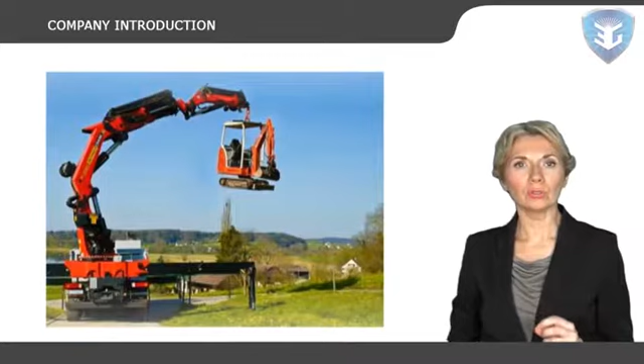Construction equipment has expanded its ability to provide custom machines for specialized applications. Today, its portfolio of authorized modification partners and accompanying support structures enables customers to meet their individual requirements throughout the Volvo global distribution network. Volvo Construction Equipment supplies complete solutions for automated materials handling and internal logistics.

The company has separated all of its material handling equipment into 4 main categories: storage and handling equipment, engineered systems, industrial trucks, and bulk material handling.

Equipment and utensils such as industrial trucks, forklifts, conveyors, etc., used for processing or otherwise handling edible product or ingredients are of such material and construction to facilitate thorough cleaning and to ensure that their use will not cause the adulteration of the product during processing, handling, or storage.

Different types of equipment are used in construction work for the handling of materials. So when a company is designing equipment for material, it is necessary to know about the purpose of that equipment. Whether it's for long distance or short distance handling, the equipment must be able to carry the material safely in the same condition to its destination.

Now in this competitive era where every day new equipment is launched in the market, a big issue in front of companies is to make such equipment which can be used for different functions. The question remains, is it easy for a company to design such equipment?

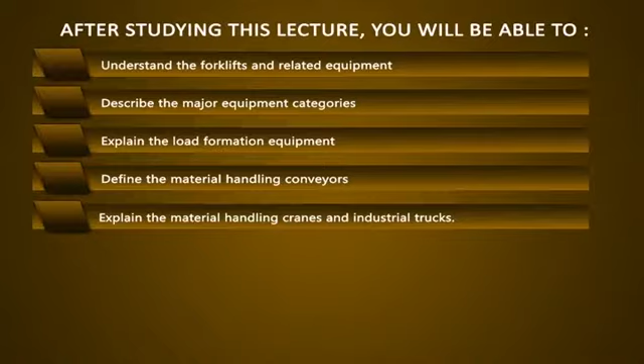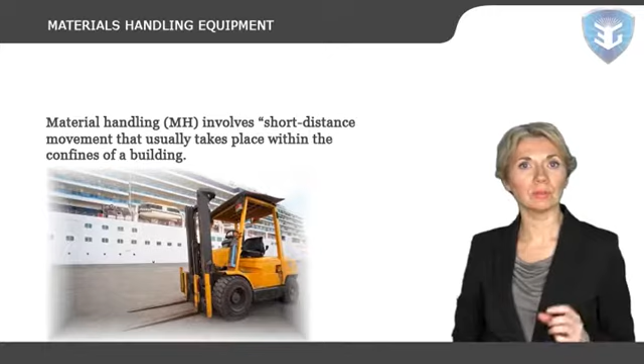Let's start with a brief introduction to materials handling equipment. Material handling, or MH, involves short distance movement that usually takes place within the confines of a building, such as a plant or a warehouse, and between a building and a transportation agency.

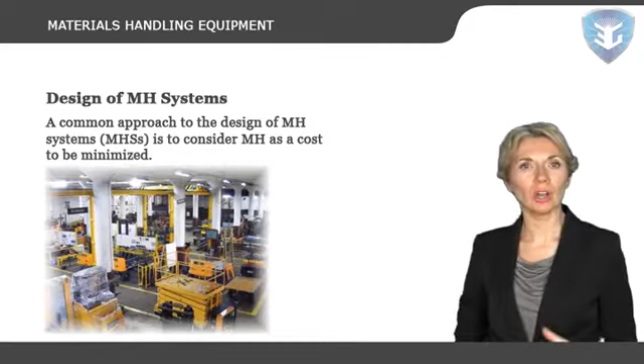Design of MH systems. A common approach to the design of MH systems is to consider MH as a cost to be minimized. This approach may be the most appropriate in many situations because while MH can add real value to a product, it is usually difficult to identify and quantify the benefits associated with MH.

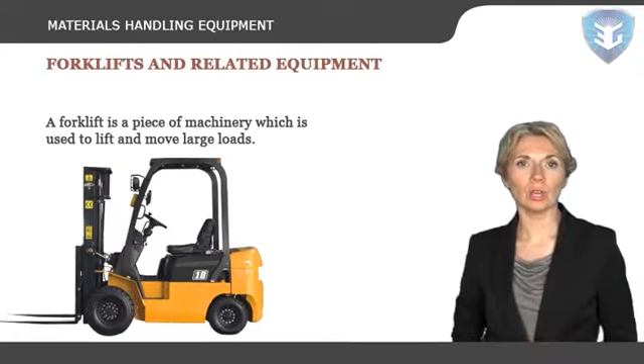Let's discuss forklifts and related equipment. A forklift is a piece of machinery which is used to lift and move large loads. There are numerous useful applications for a forklift, and many warehouses, construction sites, and manufacturing facilities have forklifts on hand.

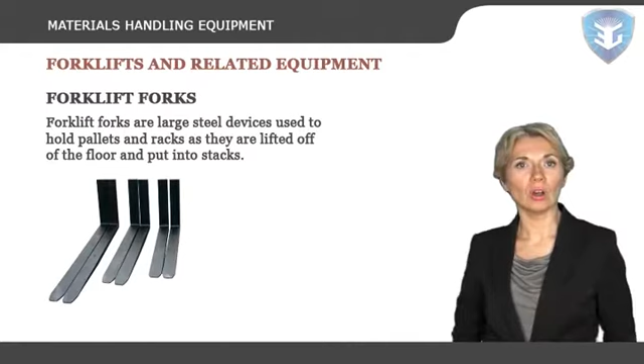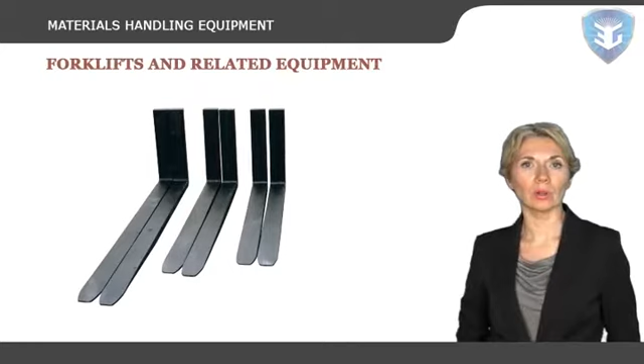Forklift forks. Forklift forks are large steel devices used to hold pallets and racks as they are lifted off of the floor and put into stacks. Made from solid steel, forklift forks are very heavy and are machined to be thick near the back of the fork and taper off to a thin front edge.

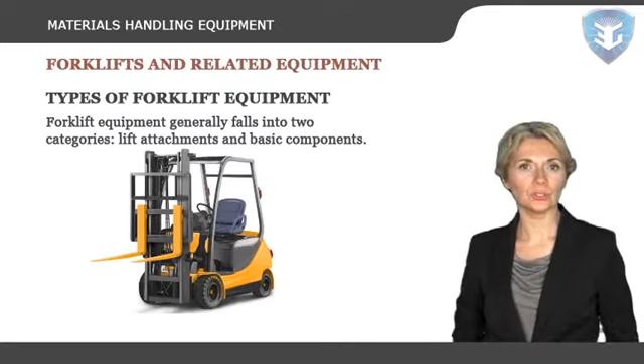Types of forklift equipment. Forklift equipment generally falls into 2 categories: lift attachments and basic components. Most basic components are included with the forklift at purchase, although they can be changed or otherwise replaced during the course of the forklift's usable life. Lift attachments are various tools that can be fitted to the lift to accommodate different applications.

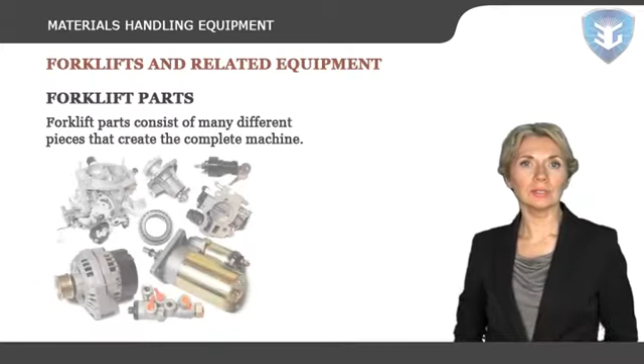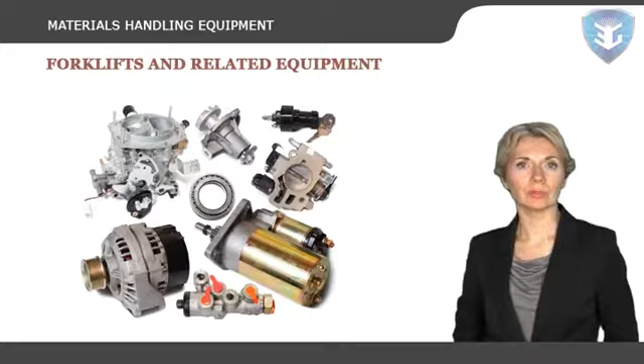Forklift parts. Forklift parts consist of many different pieces that create the complete machine. From hydraulic hoses to batteries, cables, and electric motors, forklift parts are usually very heavy and made of only the best materials.

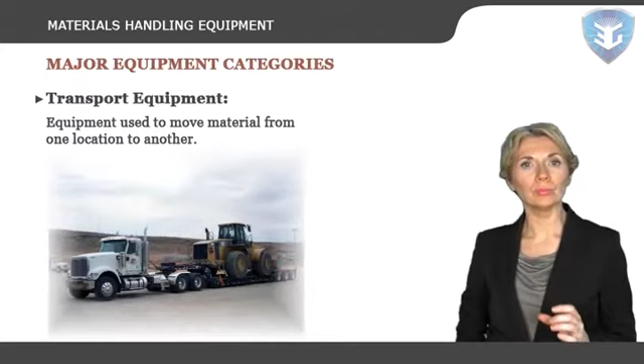Did you know the history of the forklift dates back to the 1920s, when several manufacturers began to explore new designs for lifting trucks? We shall now discuss the 5 major equipment categories. They are transport equipment, equipment used to move material from one location to another. The major subcategories of transport equipment are conveyors, cranes, and industrial trucks. Materials can also be transported manually using no equipment.

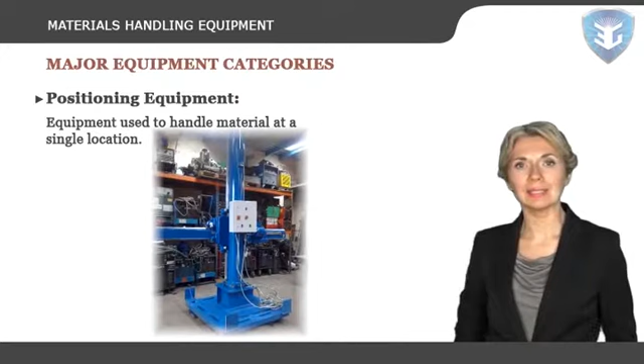Positioning equipment, equipment used to handle material at a single location. Unlike transport equipment, positioning equipment is usually used for handling at a single workplace. Materials can also be positioned manually using no equipment.

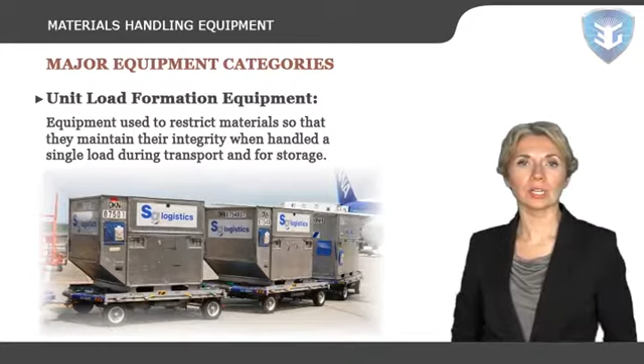Unit load formation equipment: equipment used to restrict materials so that they maintain their integrity when handling a single load during transport and for storage. If materials are self-restraining, then they can be formed into a unit load with no equipment.

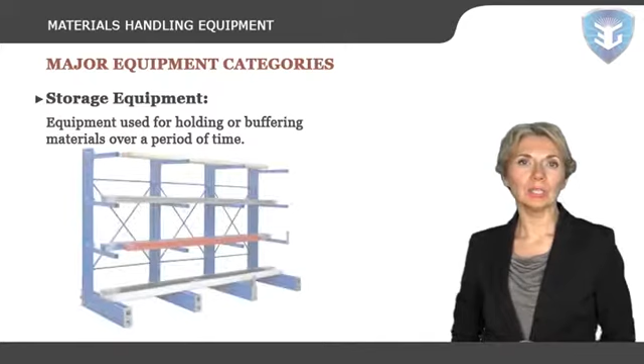Storage equipment: equipment used for holding or buffering materials over a period of time. Some storage equipment may include the transport of materials, for example, the S/R machines of an AS/RS or storage carousels. If materials are block stacked directly on the floor, then no storage equipment is required.

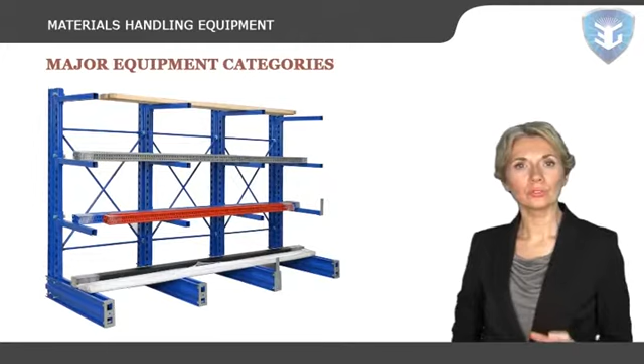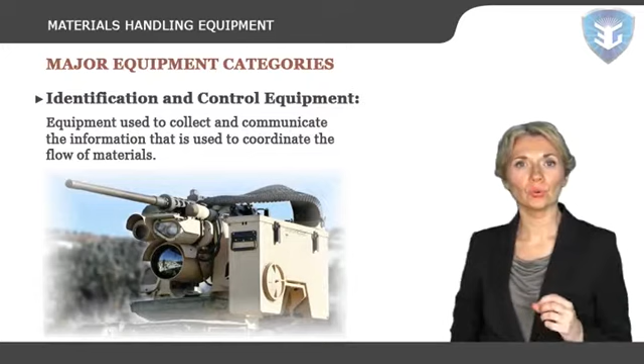Identification and control equipment: equipment used to collect and communicate the information that is used to coordinate the flow of materials within a facility and between a facility and its suppliers and customers. Let's now talk about load formation equipment.

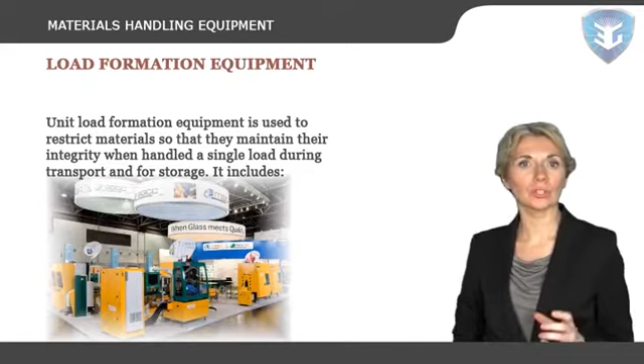Unit load formation equipment is used to restrict materials so that they maintain their integrity when handled in a single load during transport and for storage. If materials are self-restraining, then they can be formed into a unit load with no equipment. Self-restraining, no equipment: one or more items that can maintain their integrity when handled as a single item.

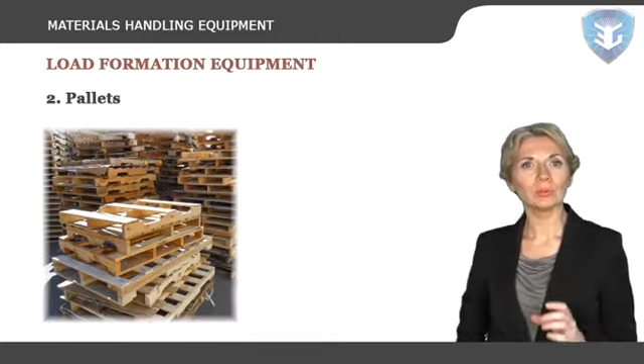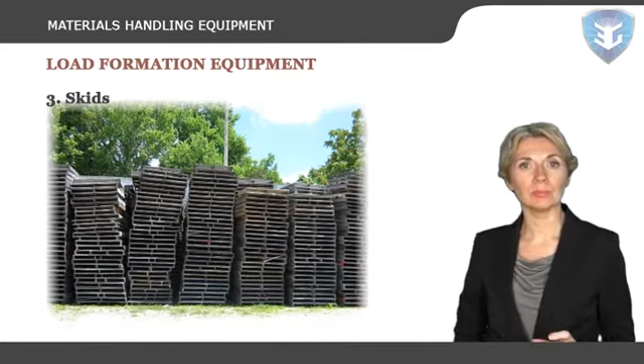Pallets: platform with enough clearance beneath its top surface or face to enable the insertion of forks for subsequent lifting purposes. Skids: platform, typically metal, with enough clearance beneath its top surface to enable a platform truck to move underneath for subsequent lifting purposes.

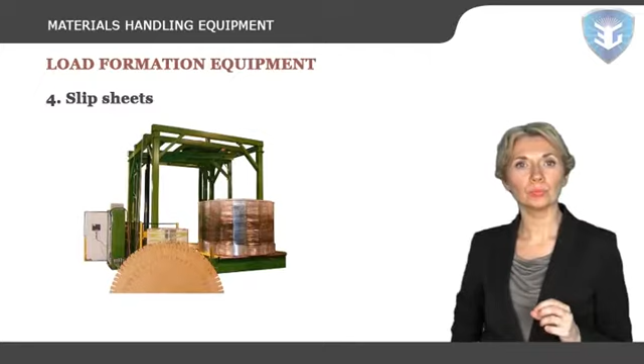Slip sheets: thick piece of paper, corrugated fiber, or plastic upon which a load is placed. Handling method: tabs on the sheet are grabbed by a special push-pull lift truck attachment. Disadvantages: slower handling as compared to pallets, greater load damage within the facility. Special lift truck attachment reduces the vehicle's load capacity.

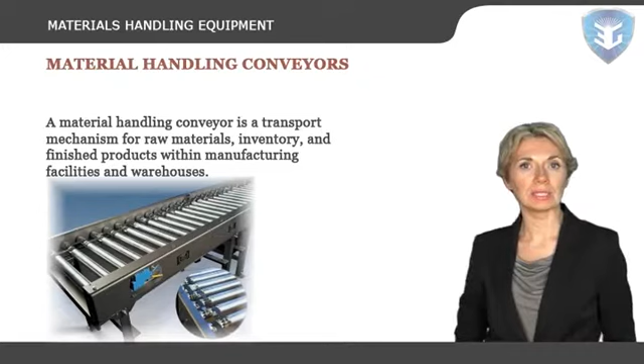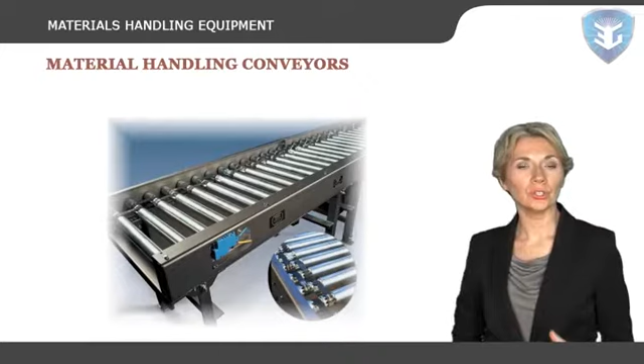A material handling conveyor is a transport mechanism for raw materials, inventory, and finished products within manufacturing facilities and warehouses. These conveyors are distinct from other conveyor systems in their construction and the fact that they are generally used for unit as opposed to bulk material transport. Conveyors are used when material is to be moved frequently between specific points, to move materials over a fixed path, when there is a sufficient flow volume to justify the fixed conveyor investment.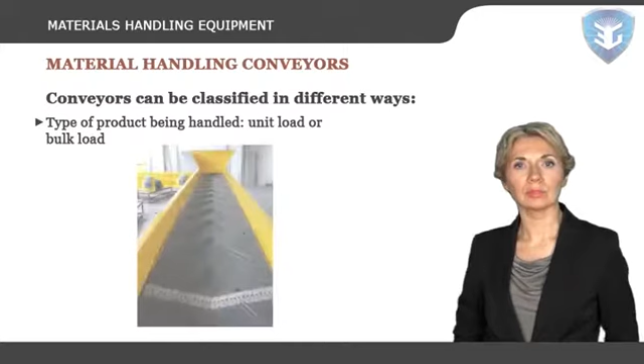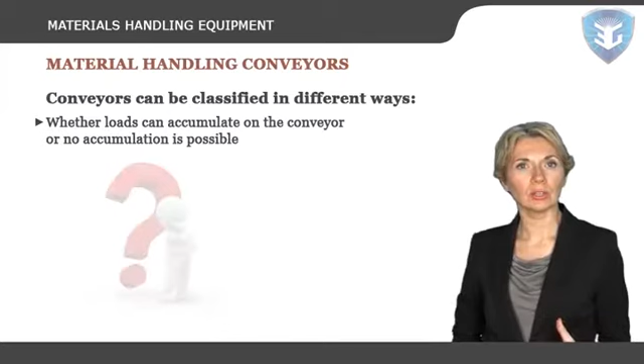Conveyors can be classified in different ways: type of product being handled, unit load or bulk load; location of the conveyor, in-floor, on-floor, or overhead; whether loads can accumulate on the conveyor or no accumulation is possible.

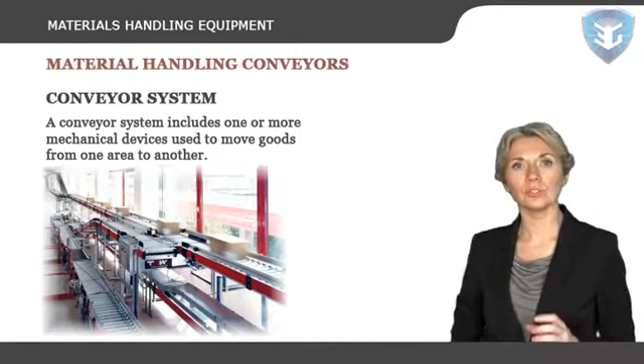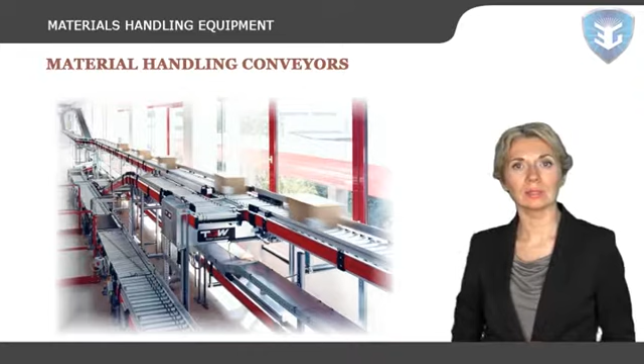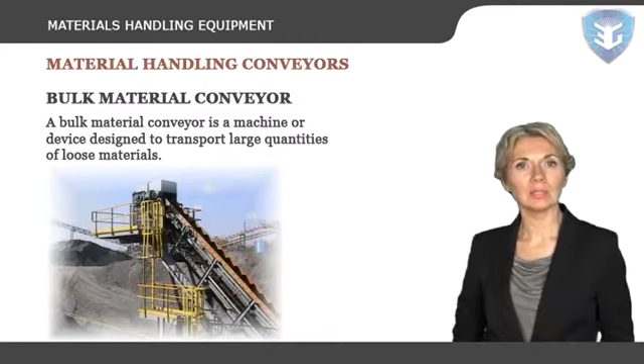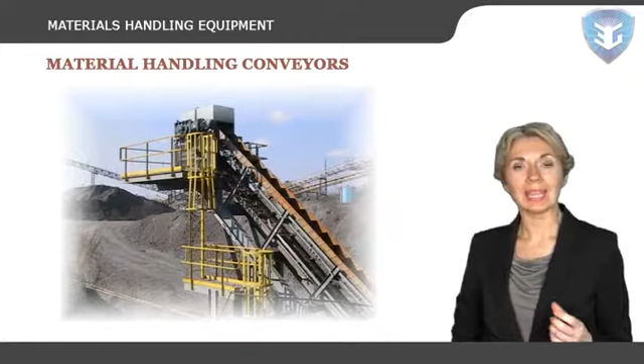Conveyor system: a conveyor system includes one or more mechanical devices used to move goods from one area to another. These systems play a key role in many types of industrial and manufacturing processes where they may be used during production or storage of products. Bulk material conveyor: a bulk material conveyor is a machine or device designed to transport large quantities of loose materials. These types of conveyors can be found in factories, warehouses, and construction, where they are used to move items.

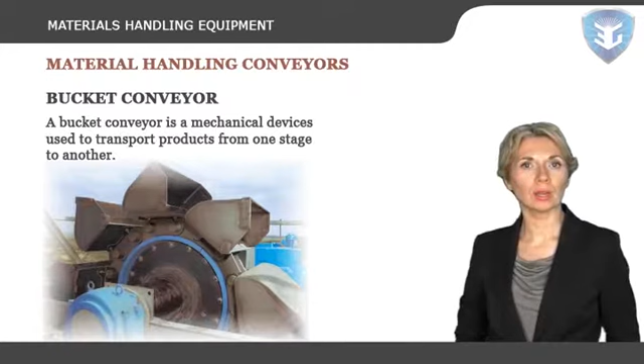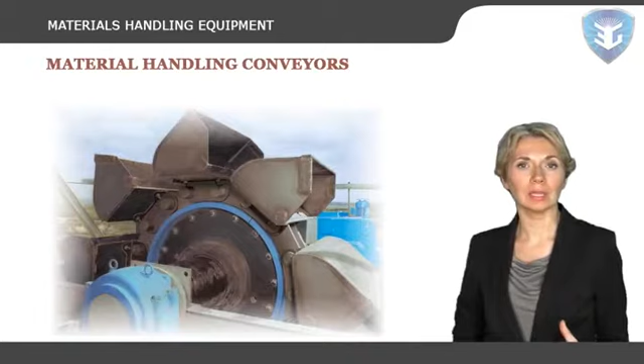Bucket conveyor: a bucket conveyor is a mechanical device used to transport products from one stage to another. Bucket conveyors traditionally are found in factory settings and can be used for tasks ranging from moving small candies off a production line to transporting plastic parts along an assembly line to moving hazardous chemicals safely and more.

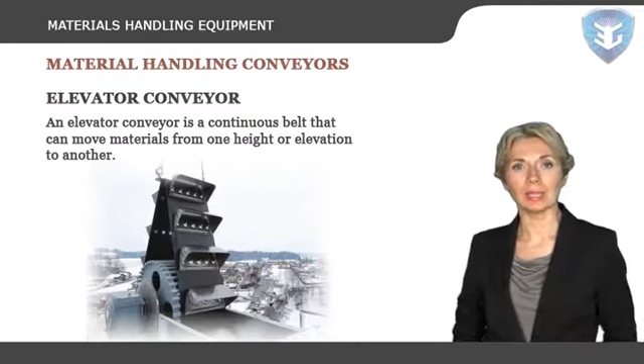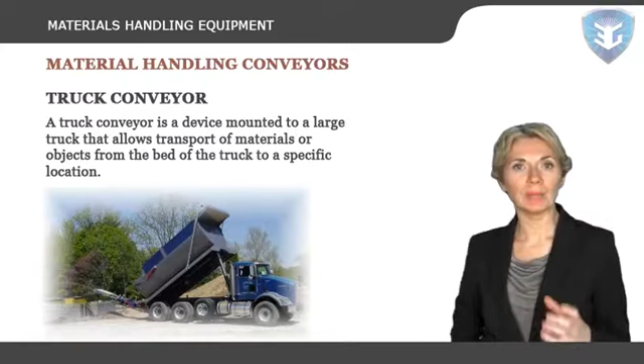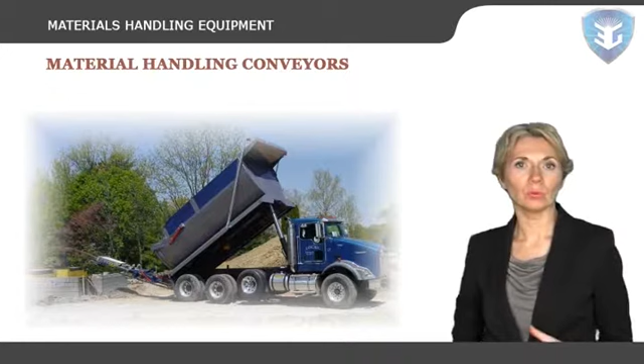Truck conveyor: a truck conveyor is a device mounted to a large truck that allows the transport of materials or objects from the bed of the truck to a specific location. The truck itself usually features a large chassis and a diesel engine, as well as a dump bed or other type of containment bed in which materials can be stored. Let's now talk about the material handling cranes.

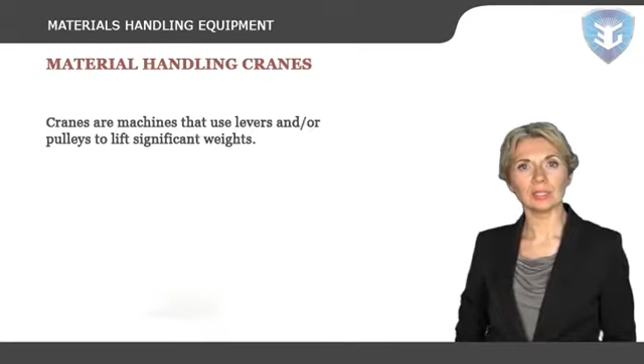Cranes are machines that use levers and/or pulleys to lift significant weights. The ones that a person might pass on the road may look like a fairly modern invention, but these machines have actually been used for at least the past 2,000 years, if not longer.

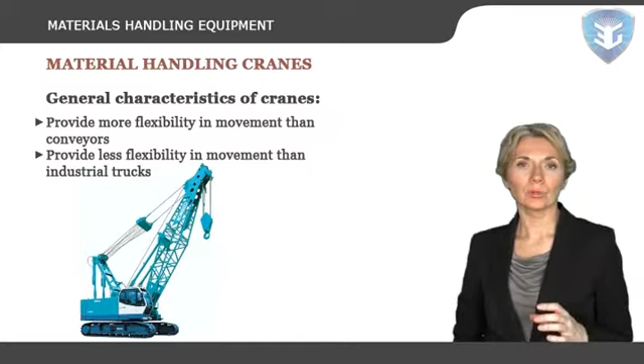General characteristics of cranes: they are used to move loads over variable horizontal and vertical paths within a restricted area. Used when there is insufficient or intermittent flow volume, such that the use of a conveyor cannot be justified. Provide more flexibility in movement than conveyors. Provide less flexibility in movement than industrial trucks.

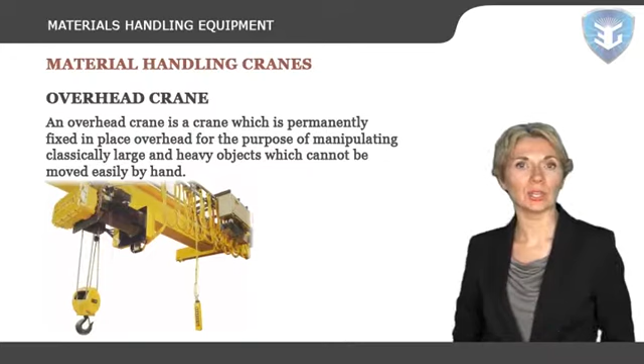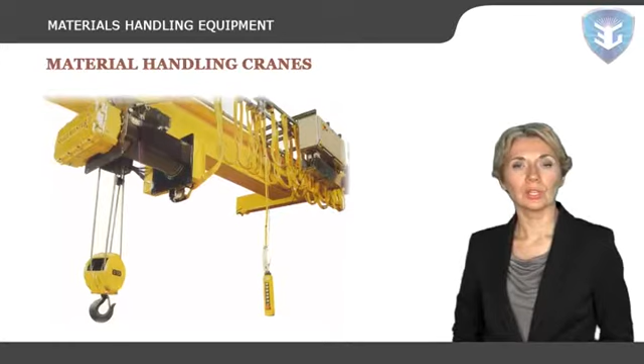Overhead crane. An overhead crane is a crane which is permanently fixed in place overhead for the purpose of manipulating classically large and heavy objects, which cannot be moved easily by hand. Steel mills usually have overhead cranes to handle the steel as it's fabricated into parts, and these cranes are also used at ports all over the world to bring objects on and off of ships.

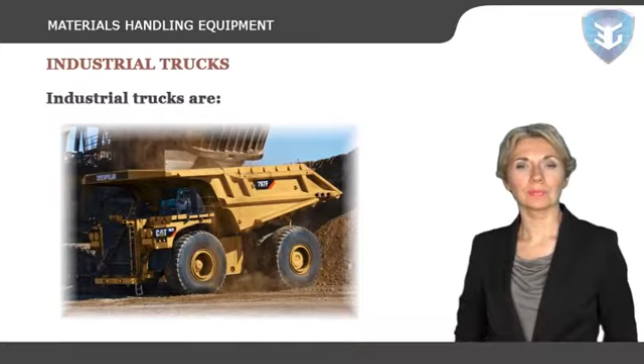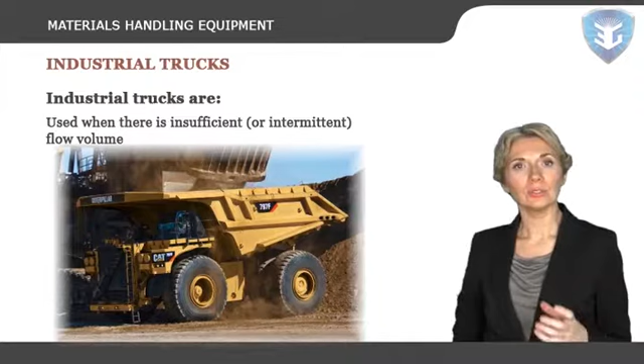Industrial trucks are trucks that are not licensed to travel on public roads. Commercial trucks are licensed to travel on public roads. Industrial trucks are used to move materials over variable horizontal paths with no restrictions on the area covered, for example, an unrestricted area. Provide vertical movement if the truck has lifting capabilities. Used when there is insufficient or intermittent flow volume, such that the use of a conveyor cannot be justified.

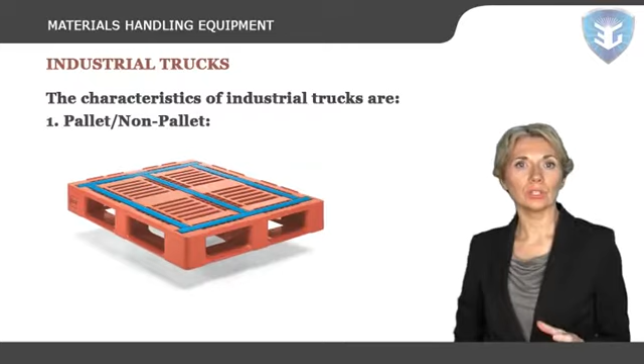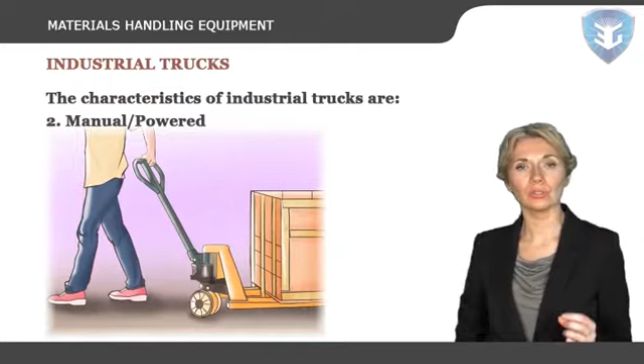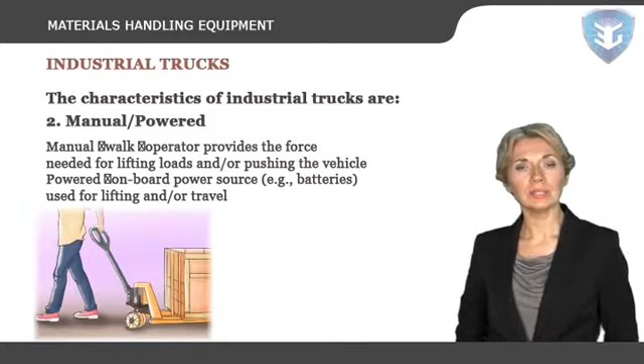The characteristics of industrial trucks are: pallet, non-pallet. Does the truck have forks for handling pallets, or does the truck have a flat surface on which to place loads? Manual, powered. Does the truck have manual or powered vertical lifting and/or horizontal travel movement capabilities? Manual: walk operator provides the force needed for lifting loads and/or pushing the vehicle. Powered: onboard power source, for example batteries, used for lifting and/or travel.

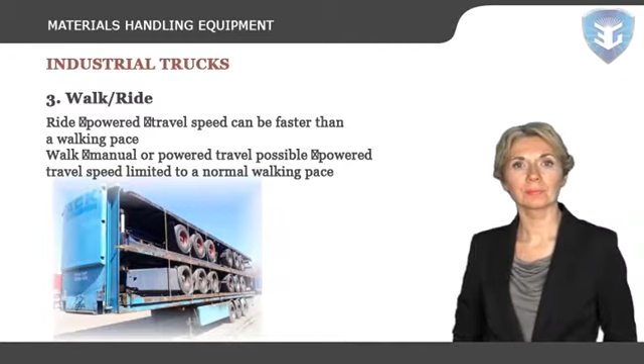Walk, ride. For non-automated trucks, can the operator ride on the truck in either a standing or sitting position, or is the operator required to walk with the truck during travel? Ride: powered, travel speed can be faster than a walking pace. Walk: manual or powered travel possible. Powered travel speed limited to a normal walking pace.

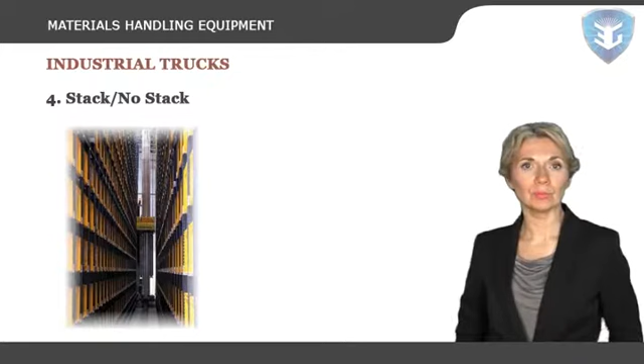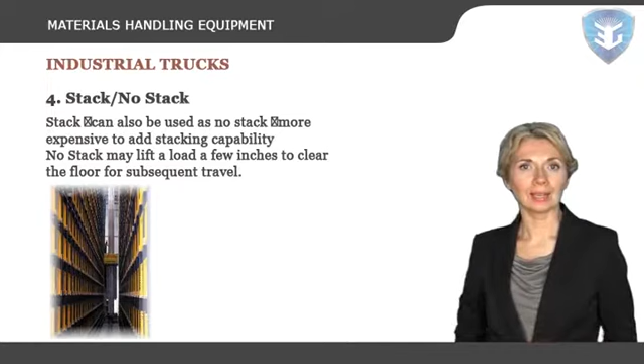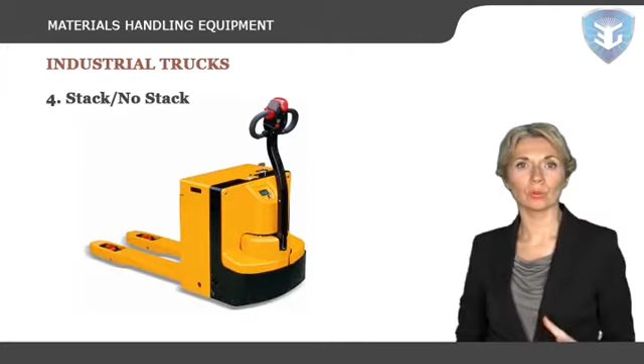Stack, no stack. Can the truck be used to lift loads for stacking purposes? Stack can also be used as no stack; it is more expensive to add stacking capability. No stack may lift a load a few inches to clear the floor for subsequent travel, for example, a pallet jack, but the loads cannot be stacked on top of each other or on shelves. Narrow aisle. Is the lift truck designed to have a small turning radius, or does it not have to turn at all in an aisle when loading or unloading?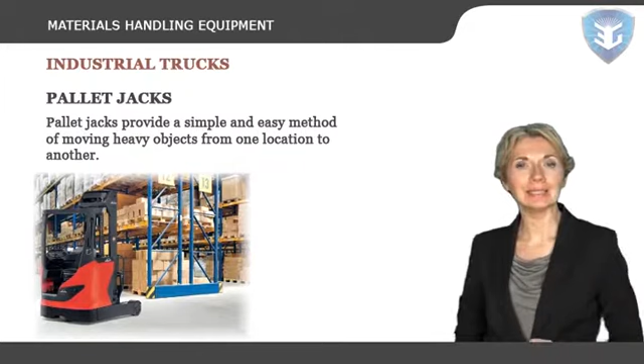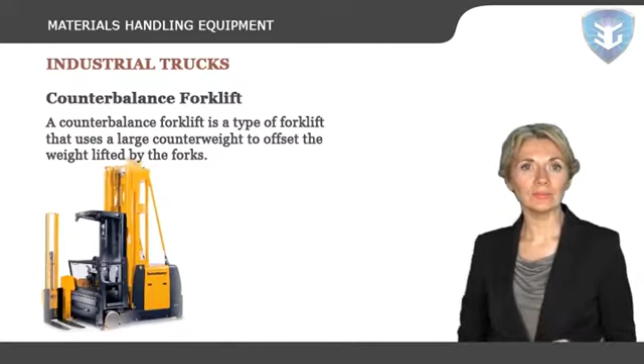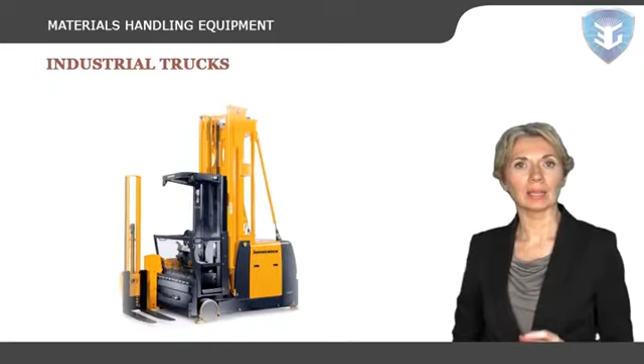Pallet jacks. Often used in manufacturing plants, warehouses, and some large storage facilities to quickly and easily move pallets of goods. Pallet jacks provide a simple and easy method of moving heavy objects from one location to another. Counterbalance forklift. A counterbalance forklift is a type of forklift that uses a large counterweight to offset the weight lifted by the forks. The counterbalance forklift uses a heavy cast iron weight attached to the rear of the machine and will typically use the battery pack of an electric lift as part of the counterbalance system.

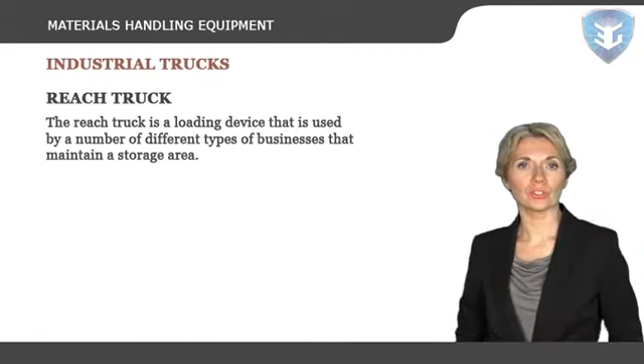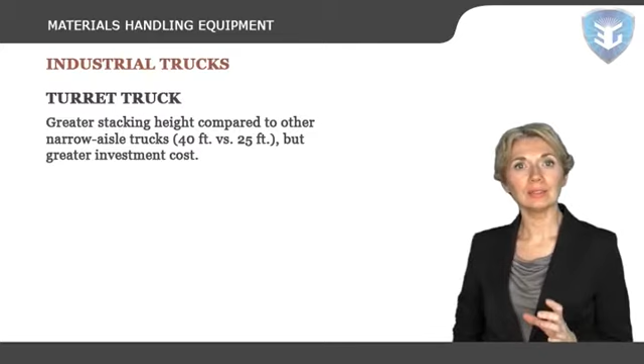Reach truck. The reach truck is a loading device that is used by a number of different types of businesses that maintain a storage area that involves the arrangement of supplies and finished goods on pallets that are inserted into tall shelving structures. Turret truck. Greater stacking height compared to other narrow aisle trucks, 40 feet versus 25 feet, but greater investment cost. Forks rotate to allow for side loading, and the truck itself does not rotate during stacking.

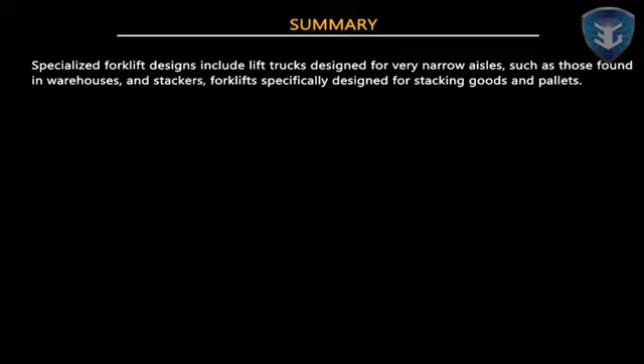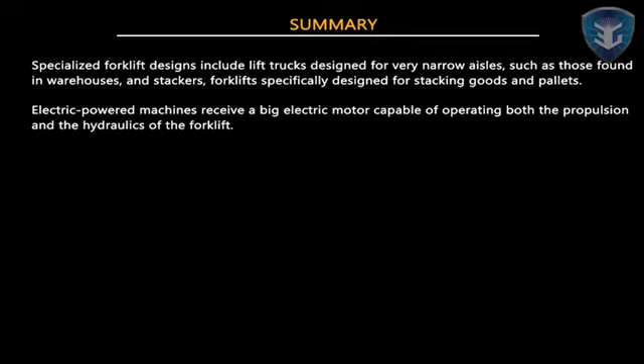Now in the end, let us summarize what we have learned in this lecture. Specialized forklift designs include lift trucks designed for very narrow aisles, such as those found in warehouses, and stackers, forklifts specifically designed for stacking goods and pallets. Electric-powered machines have a big electric motor capable of operating both the propulsion and the hydraulics of the forklift. Transport equipment is used to move material from one location to another, while positioning equipment is used to manipulate material at a single location.

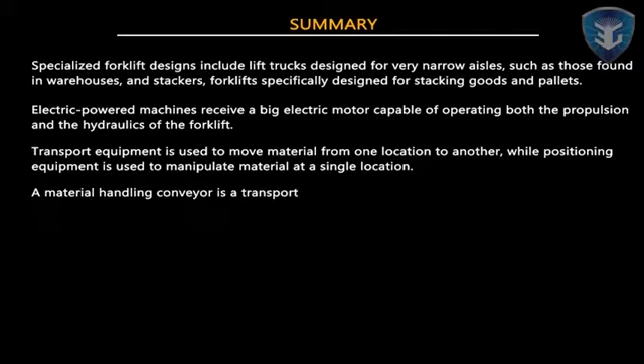A material handling conveyor is a transport mechanism for raw materials, inventory, and finished products within manufacturing facilities and warehouses. Conveyor belts are one of the more efficient and widely used transport mechanisms in manufacturing, industrial, and warehousing environments.